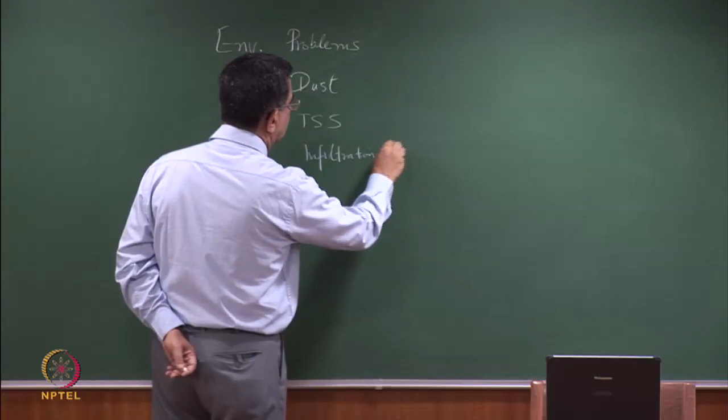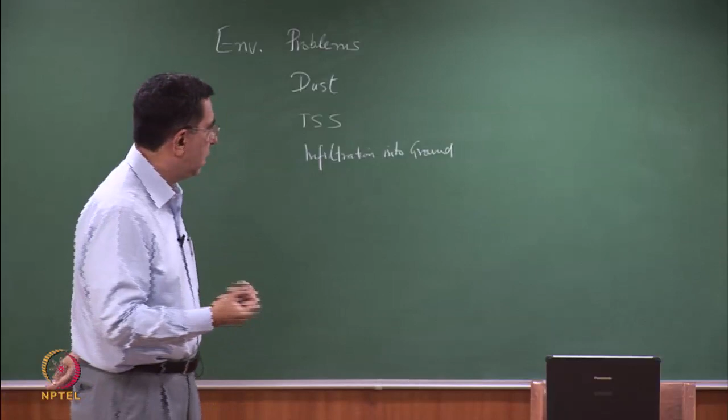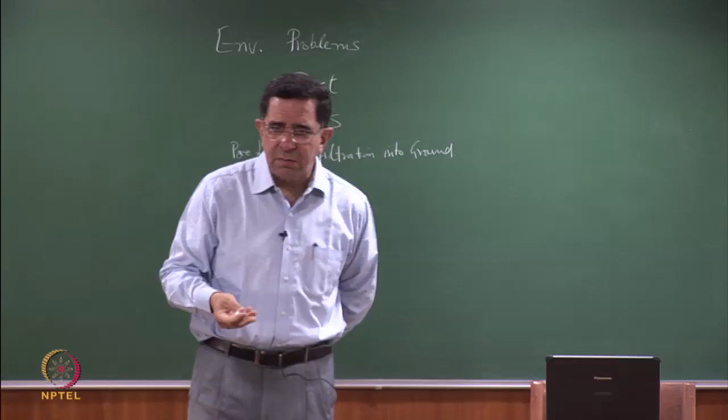Any other thoughts which come to mind, or any other issues which you think would influence? Well, it may infiltrate into the groundwater, but if the water is okay, so, infiltration into ground. So if the leachate, or if the pore liquid, is not of good quality, then you have an issue. If the pore liquid is all right, then there may be another related issue which we'll look at.

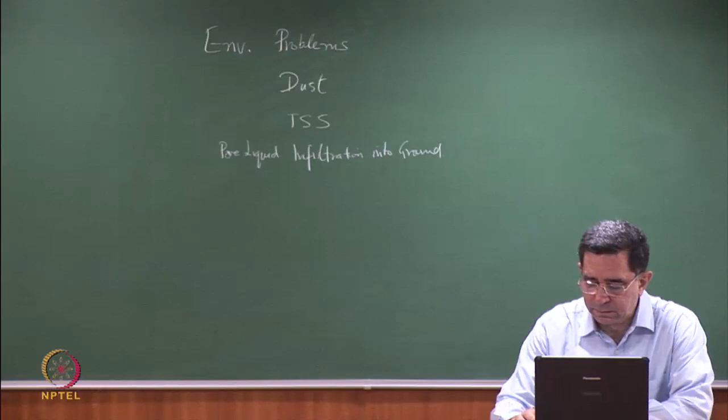So let us see, these are some of the factors which come to mind in an overall context. What are the environmental issues that we look at? If you look at an ash pond or a slurry pond, we talked about fugitive dust. The dust is not going to come out from the ponded area, it's going to come out from the dry area. Our tendency is to keep the pond as small as possible so that the phreatic line is not high, that can be a problem. But if you are very close to habitated areas, you might want to run your slurry pond by keeping the water level high.

Excess suspended solids in the decanted water is also another problem. As somebody said, leachate into the ground. Sometimes concerns are expressed that there may be some deleterious salts or material in this. So one issue is that those will go with the leachate to the groundwater table, but more importantly, if they also come out, they can affect the crops adjacent to it. There's not enough evidence to say so, but since this material is not natural but man-made, either from burning of coal or from crushing of rock and chemical additions to extract metals, sometimes there is an issue that some of this deleterious material will come out and affect plant growth, or it will be taken up in the roots of the plants.

Occasionally we do have the problem of overtopping, which is more a stability problem, but what is the difference? Suppose I have a water reservoir and I have overtopping. Overtopping will occur if the spillway capacity is not adequate, or if there is a large rain and you are already full up without adequate freeboard. Overtopping normally occurs when your ash or slurry pond is operating at full capacity and you have a huge downpour with spillways not having adequate capacity.

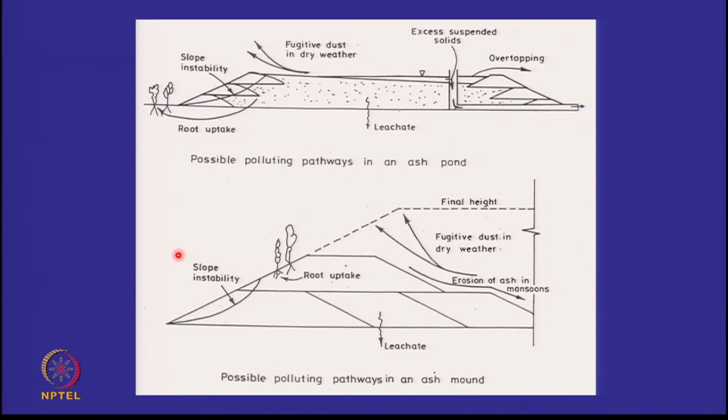So if I want to address the environmental concerns, I have these few issues: effect on local air quality because of dust, effect on surface water quality because of total suspended solids, and effect on groundwater level and groundwater quality.

So these are two issues which are separate. If I have got deleterious material, or contaminants in the water, if the pore fluid quality is not good, then I can affect the groundwater quality. But the other issue is I may also sometimes affect the groundwater level, and that may have its own associated problems.

If the dust is taking away ash, what is the effect on local soils and biotoxicity? Last year there was a big news item that apple orchards in Himachal were being affected by ash from a nearby plant. During the pollination period, the ash particles were settling down on the plants, and that was affecting the pollination, the conversion of flowers into fruit. It looks very innocuous, a small amount of dust, but in an area not used to dust, if you create an environment with small particles floating around, it can affect the local soils or biotoxicity.

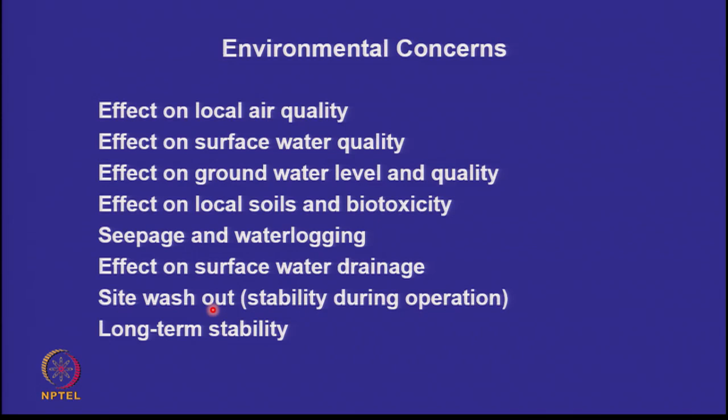Site washout or overtopping is of course an important issue. And finally, long-term stability. When the plant has stopped operating and everyone has walked off, who is going to look after it for 100 years, 200 years, 500 years?

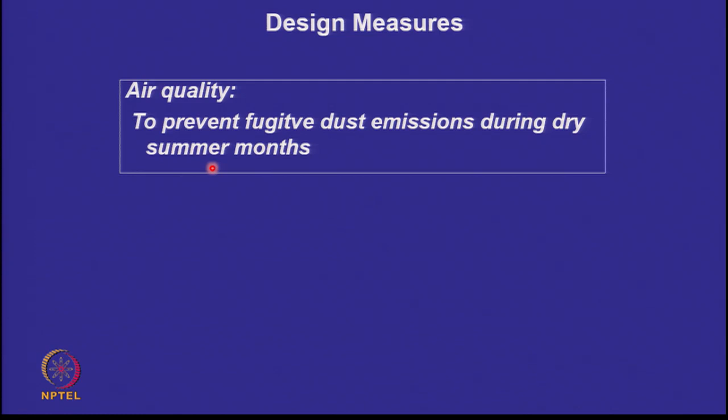So let's address this. The first question is how to prevent fugitive dust emissions during dry summer months. It's simple, you can do ponding. If you are in an area where dust is causing a problem, with a highway next to the pond causing huge dust emissions, or houses nearby, you can increase your ponding as long as you have excess water supply. That means don't operate the pond in summer months at a low level, increase it and keep the majority of the ash submerged.

One can also say I can sprinkle, but 24/7 sprinkling is a very costly exercise, and it is power dependent. I have not seen sprinklers which can keep the dust subdued 24/7. You may do sprinkling while you are there, you may have automated sprinklers, the idea is to keep the dust down, but 24/7 sprinklers working on any area I have not seen.

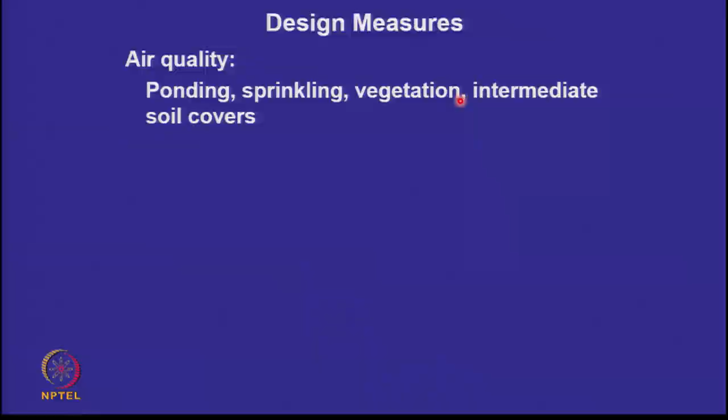Of course, when the pond reaches its top level, you should grow vegetation on it, either by putting a soil cover and vegetative growth, or if even on that material shrubs can grow, then accelerate that vegetative growth, because any form of vegetative growth will be a dust control measure.

And sometimes you might want to use intermediate soil covers. That means if you have a material going up to 15 meters high, you can build in an expenditure that after every 5 meters, you put in an intermediate 6-inch soil cover, so that the ash surface area is not exposed. This intermediate soil cover works more when you're using ash as a construction material in embankments, so that you don't leave very large patches of ash exposed in a dry condition.

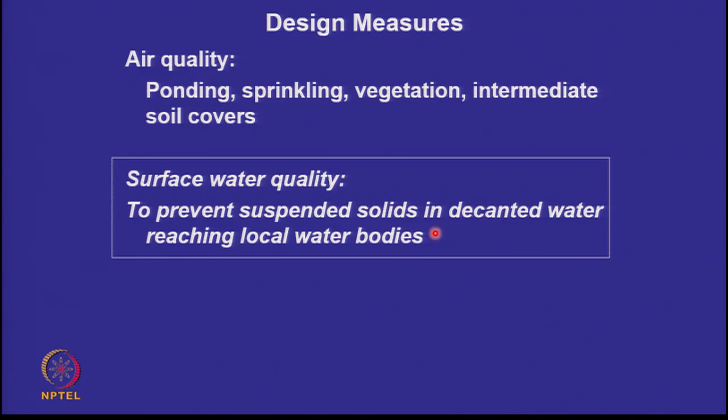Surface water quality - we have addressed this issue. How do we prevent suspended solids in the decanted water from reaching local water bodies? If the size of your pond is correctly designed, then the finest particles will settle and you will have clear water coming out. The problem comes when the size of the land available to you is smaller than the design size. Then you have a tendency for the coarse particles to settle, but a certain set of particles will pass out. For that, either we need additional sedimentation chambers, or filters which become choked and have to be periodically cleaned, or we can put a treatment plant at the end of the decanting pipe where you flocculate all these fines and deposit them.

It's very expensive. And finally, recirculation means that you are not releasing any water into the surface water body nearby. But recirculation you can do only for a limited period of time. The material keeps getting built up in the slurry water, and eventually you have to do a blowdown or release something, and at that time you will need all these alternatives.

So even today, sometimes when I walk to an ash pond, I'm often seeing this when the pond is full. When the ash is down, even if the horizontal travel time is not adequate, you can close the lower ports so that the water level also rises, giving time for horizontal travel and time for vertical rise. So you can have more retention time. But when the pond is almost full, you are not able to hold any more water, and that's the time when you find the emissions becoming high.

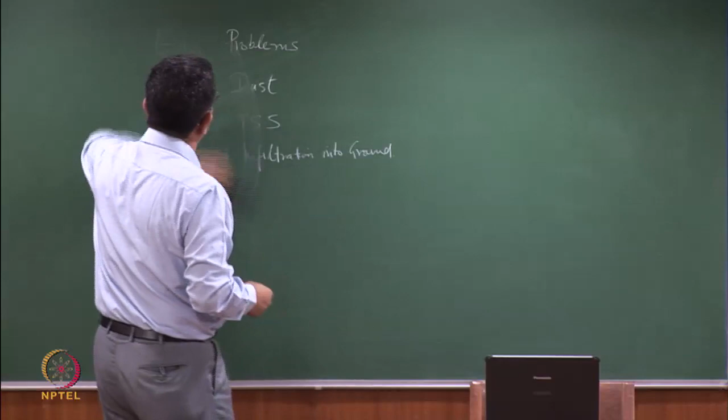In terms of groundwater, there are two issues: one is preventing the rise of the water table, and the other is deterioration of water quality. If I look at the issue of rise of the water table, I want to appreciate it this way: if you make a slurry pond in an area where there has never been a water reservoir in the past, your water is coming either from a canal or from a river, maybe 20-25 kilometers away, and now you have made this pond, which is like you have created a lake.

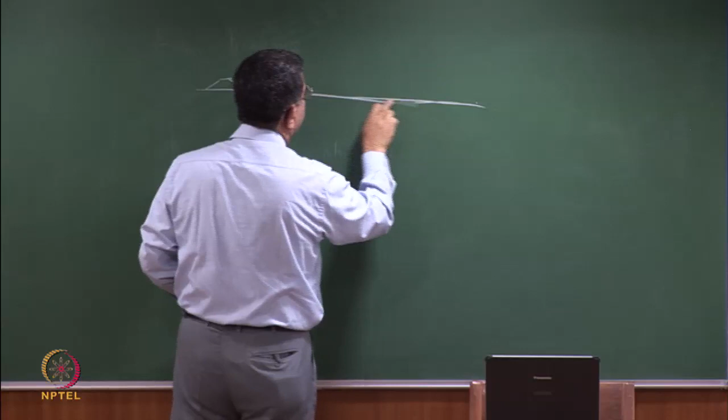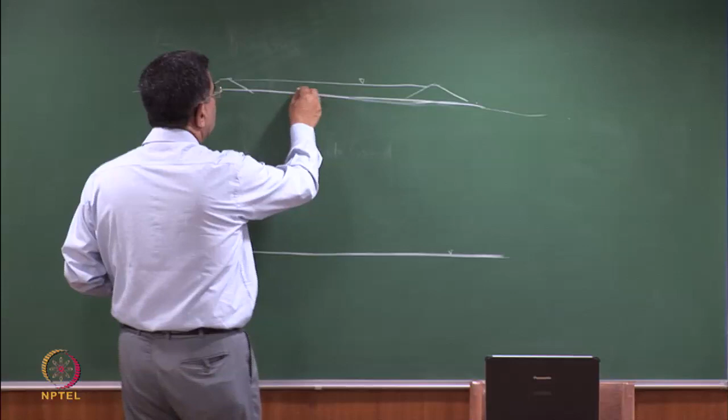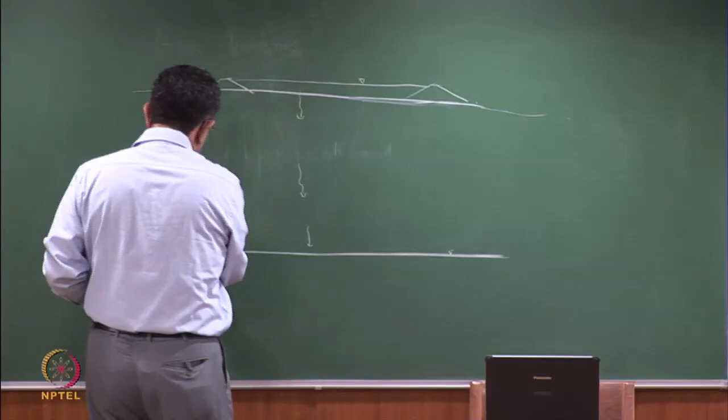So maybe in the original site, the water table is deep below, and you create a ponded area. Remember, this is going to work for 25 years, so you're going to have water most of the time in that period. If there is no barrier to downward flow - that is, no impermeable or very low permeability soil - then this water will tend to flow down. Some will be held, some will reach down, and if a lot of water is flowing down, the water table may rise, forming a mound of water in this area because a lot of water is coming. Eventually it will just flow away. When the pond stops functioning, the water table will come back to its original position.

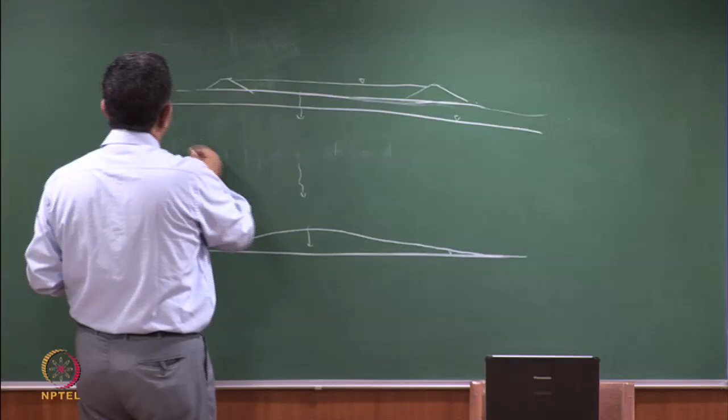If my water table is here to begin with, then I have to be very conscious of the problem, because then this water table and the pond water will get interconnected. The water table rise may look like that.

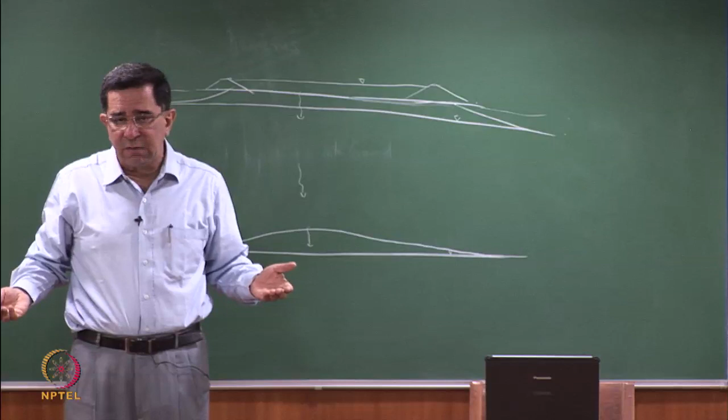And this water table may rise. Now, as long as the water table rise is beneath the pond, it's fine. But if the lateral permeability of the soil is high, the water table rise may start to extend beyond the pond. And I'm not talking of the seepage water which is through the embankment.

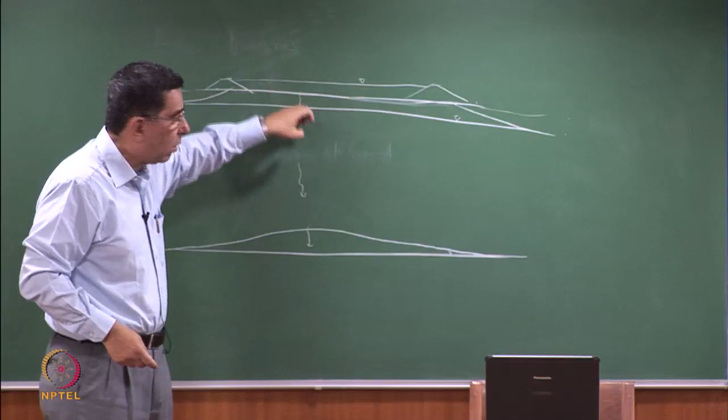I'm talking of the water which is going down. Now, when this water table rises, sometimes it brings up the salts from below, which were not in the crop zone, root zone of the crops, up. And that sometimes has an effect on the production of the crop output.

In some cases, it may be very good. If you are in a water deficient area, what have you done? You have started giving more water to the area. Assuming that the water quality is not affected, the farmers around you are happy. There is more water in the tube wells, there are more water in the irrigation wells, so that's good for them.

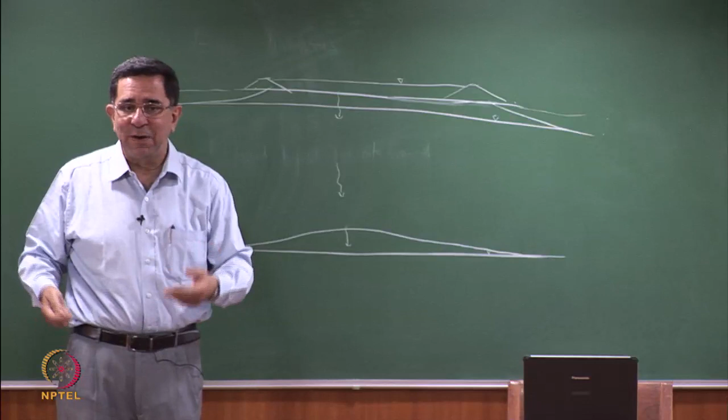You are in an area where water table is already aplenty and close to the ground surface. You are doing the opposite effect. They don't want more water, they don't want the water table to come higher, but we are making it go higher. So this causes the water table to rise. It can be beneficial in a water scarce area. It can be problematic in a high water table area.

So the one thing that we have to realize is, as you will see here, if this is the original groundwater table, this is the original land, I have come and made my ash pond or slurry pond, my water table has risen, it has become connected. After some time, when the ash pond or slurry pond is not being operated, there will be no water. You will put a soil cover, you may put some vegetative growth on top, and then the water table will return to its original position. But for these intervening 10, 15, 25 years, you can have some effect of raising the local water table, and that you have to take into account.

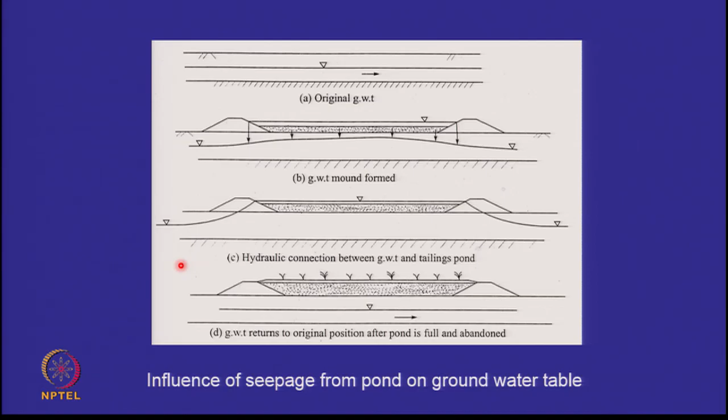So, what about the quality? Before we look at the next issue, what about quality? Water quality will depend on the slurry water, that is, are you getting treated water? Are you getting raw water from a river? Is the river water itself in the summer months having high contaminants?

Now, normally the water that you get for the purpose of making a slurry or for the purpose of chemical processes may not be a very high quality water. So then what you are doing is, you are picking up the water, making a slurry and depositing it on land. So if the water quality used for making the slurry is bad, then it can impact the groundwater quality. The other is, no, inflow water was good, but my tailings had some residual chemicals, and those chemicals are now mixing with the water and going down. So this is a very waste material specific problem.

For a long time, there has been a huge debate that does the groundwater quality get affected by burning ash, by burning coal and using the slurry technique of depositing the ash. Does the quality of the liquid in which the ash has been mixed with the water, does it affect the groundwater table? And there have been so many studies which show there is no effect. If there is an effect, it may be because the original water quality was itself bad.

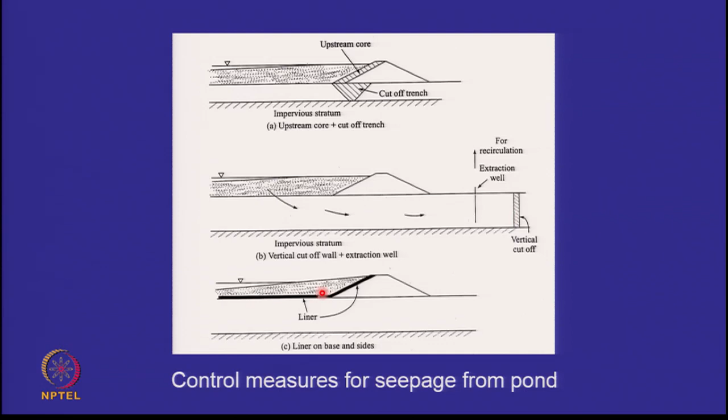So this is the best. And while the word used is liner, it means it has to have bottom drainage also, and liner. Because otherwise, incremental raising is very, very difficult. So purely from the point of view of affecting the groundwater, both in terms of the groundwater table level as well as in terms of the quality, you are safe if you use a liner with bottom drainage.

However, it's expensive because the size of these ponds is huge, 2 kilometers by 2 kilometers. So that's a very expensive bottom barrier that you have to create. But there are no options at the moment. There is a ministry guideline saying you must put a liner at the bottom. It doesn't give the details of the liner, so people will put some thin plastic sheet to meet the Ministry of Environment and Forests guidelines. In the US now, they are specifying the requirement of liners and bottom drainage. The rules have just come out in October 2016. So really, if you are looking at groundwater quality as well as groundwater level, bottom drainage and liner is a good thing.

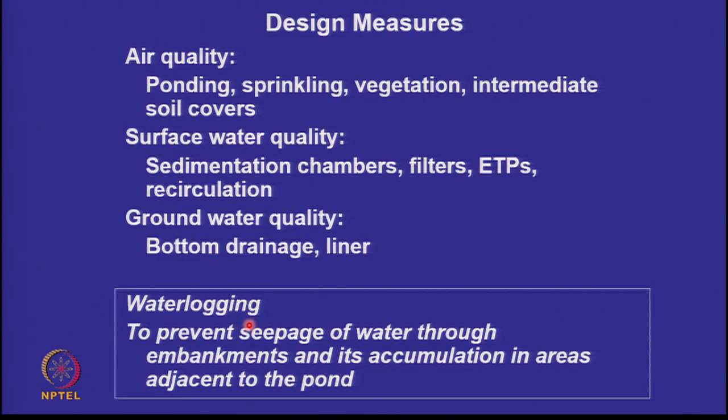Even if we have taken measures that the groundwater will not rise, we still have sometimes the issue of waterlogging. And waterlogging is normally due to seepage from the embankment, not from the base. It can be accentuated from the base as well, but if you don't collect your seepage water properly and connect it to a surface water drain, then what will happen is, suppose in plan I have a rectangular pond, in some area, the water may start to seep out and collect outside, and that causes waterlogging.

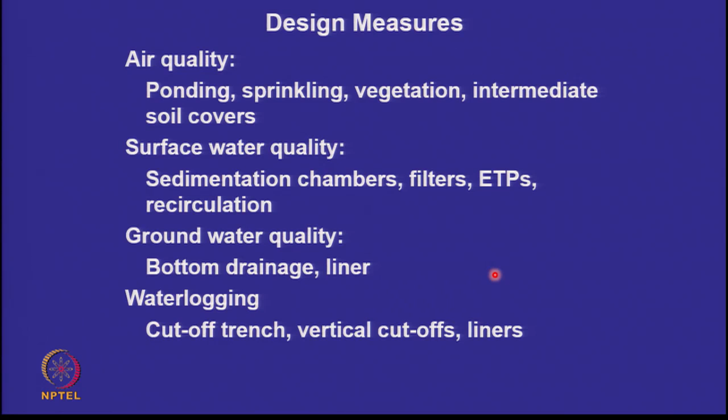So to prevent waterlogging, it's best to have a cut-off trench, which I showed, or vertical cut-off walls. Liners, of course, are the best solution. But in any case, your surface water drain or the interceptor drain outside the embankment should be able to take away this water and connect it to the local drain from which the water flows away. So efficient collection of the seepage water is important, and measures that ensure nothing from the bottom comes to the sides are also important.

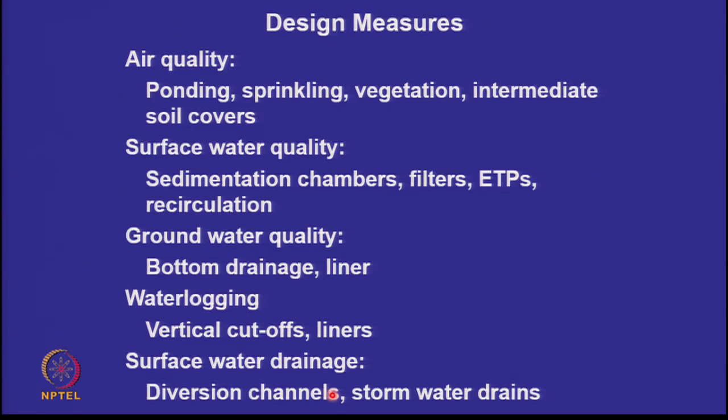And we've done this surface water drainage issue, blockage of the surface water drainage path, that if we are in a low-lying area, we normally don't consider this, but we have to make diversion channels. So if I'm in a low-lying area, let us say I have a concave upward shape, and the elevation of the ground on one side is higher, on the other side is lower, and you have made your pond or landfill in between. If I do that, I have to give channels at the side so that the water which comes from behind during the rainy season is not stopped by this whole mass of waste disposal facility that you have created, but it should be able to go from the sides, bypass this, and meet this in the front.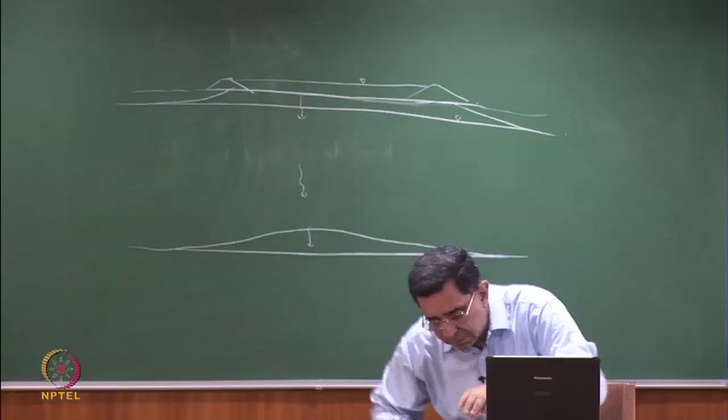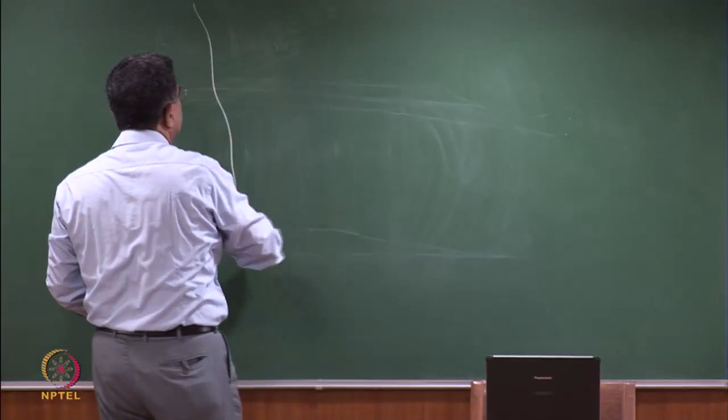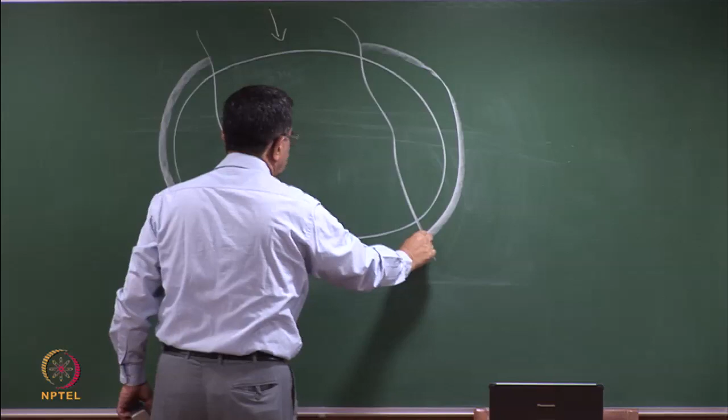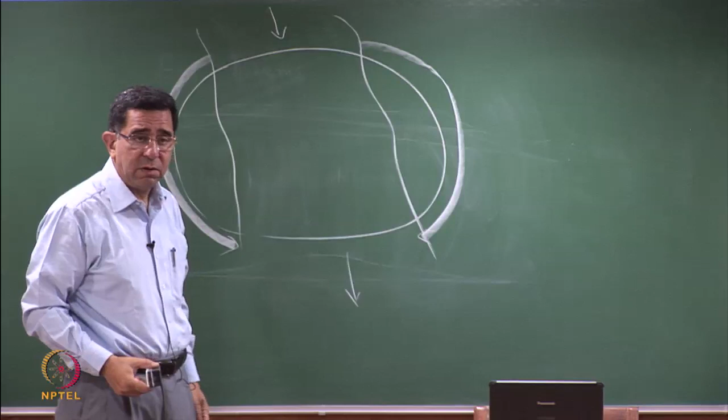So we have to create alternate flow paths so that there should be no ponding of water behind it. So if I'm looking at in plan, let us say this is a low-lying area, and I have used this area for the purpose of creating a pond or a landfill. Now when the flow comes, there will be ponding of water behind it. Instead of that, I need to have alternate paths in the form of channels so that this flow continues uninterrupted and does not cause ponding upstream of this facility that you have created.

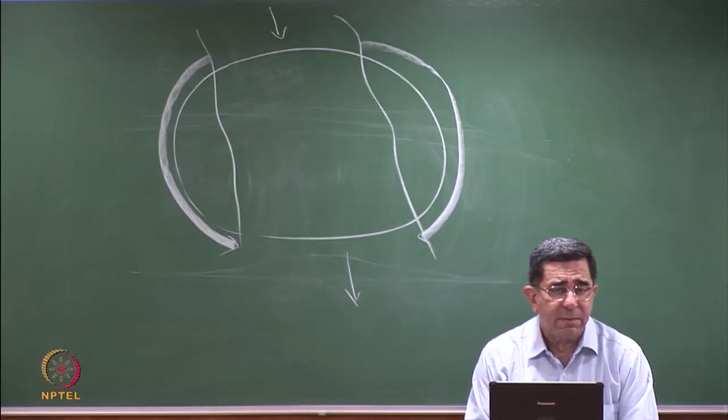Finally, we would like to address the issue of long-term stability. I have made a pond with all these measures that we have talked about here. The only question is, are we bothered about long-term stability? Long-term stability means when human intervention stops. I don't have a maintenance engineer on it for life, or for 100 years or 150 years. Then the facility you have created now is a topographical high. You went up, going higher and higher by the upstream method. There was no topographical high in that area before. You make the embankments, you put some vegetative grass, you go away, nobody irrigates it, and the grass begins to dry up. So you must have something which is stable for at least 50 to 100 years after being abandoned.

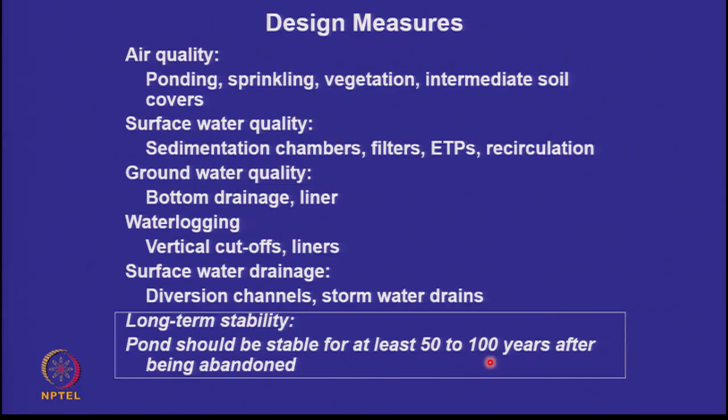One issue is the top surface - we have to put soil on it and do vegetative growth. The other issue is also on the sides. Any vegetative growth assisted by irrigation will not survive, so all vegetation has to become self-generated vegetation. That means the local shrubbery and local vegetation has to be put in position.

The only last thing that is bothersome is the material deposited between the embankments by the upstream or downstream - that's soft or loose material hydraulically deposited. Should we densify it before we move on, or should we leave it loose? That's the only question.

Densification is not easy or cheap, but if you remember your ground improvement techniques, in situ densification of coarse-grained soils, or silty sands and sandy silts, you have a few alternatives. Do you remember those alternatives? Impact compaction, vibroflotation, compaction piles.

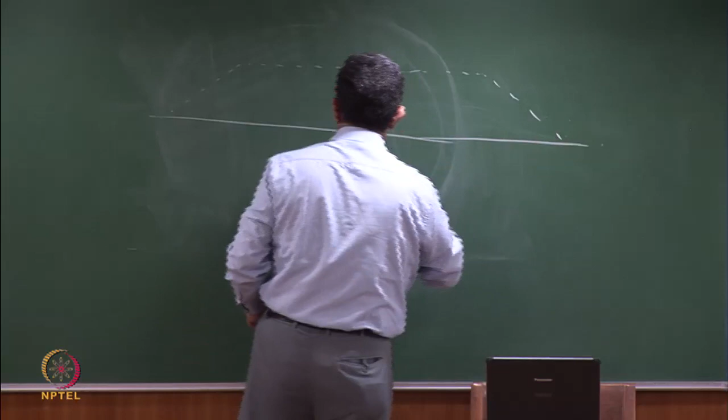Blasting - the idea is, I have created a mass 1 kilometer by 1 kilometer, say 20 meters high, which is relatively loose. If I don't densify it, the top surface will eventually settle with time. So one option is to have adequate convexity in the closure. If the final profile is like this, I should give adequate convexity at the top so that surface water is always running away.

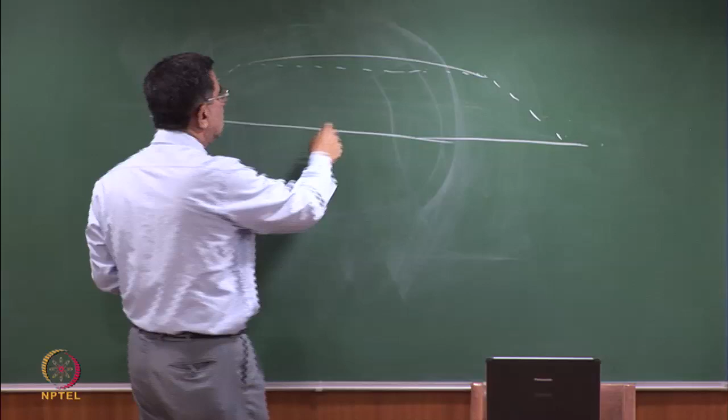And the other question is, should I densify? If you can, why not? And as I said, it should be self-generative vegetation.

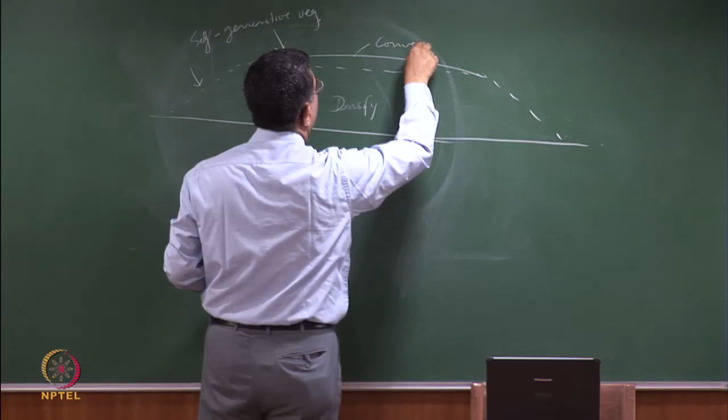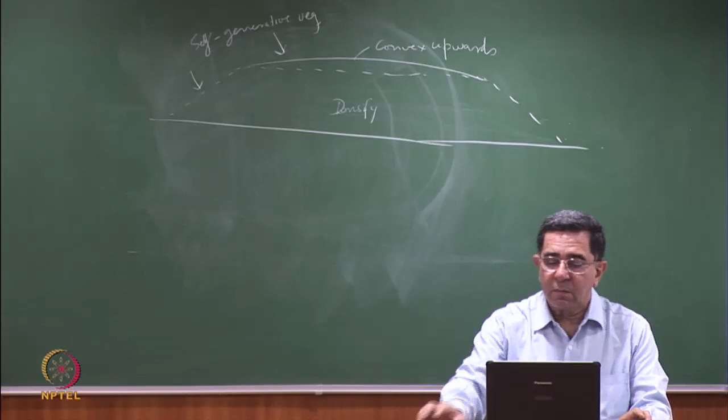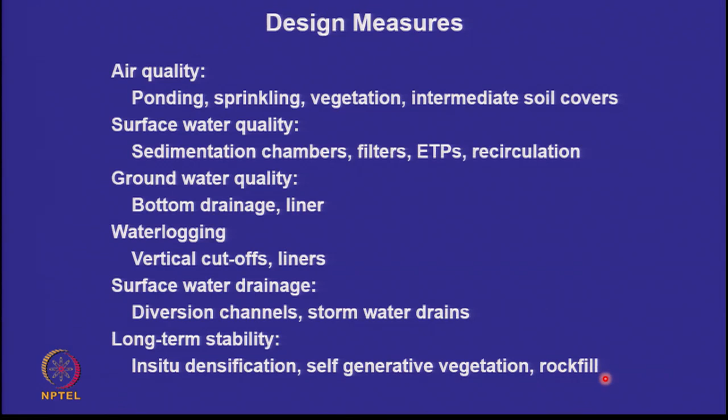So long-term stability implies in situ densification, self-generative vegetation, or rockfill. If you cannot get it - suppose you're in an arid area, dry arid area like Rajasthan, and you don't have self-generative vegetation there - then you might have to put a riprap or an armor, a hard material which doesn't blow away and doesn't have erosion.

So eventually, an engineered closure of a slurry pond - a liner and a drainage material here. These are your upstream raisings. You had the soil cover on it, you have to have vegetative growth, you have to have a soil cover on the top, vegetative growth, and you have to have it densified.

If you intend to densify, the cheapest method for densification is blasting, because blasting is like creating artificial vibrations and densifying. It will not be uniform though - so don't think that after blasting you're going to get very uniform compaction.

When you're going to build buildings or any structures on it, you'll still have to locally densify that zone by vibroflotation or compaction piles or whatever you want to do. But as a mass, if you want to densify the material, do blasting so that this mass remains stable later on. So what you do will depend on where you are.

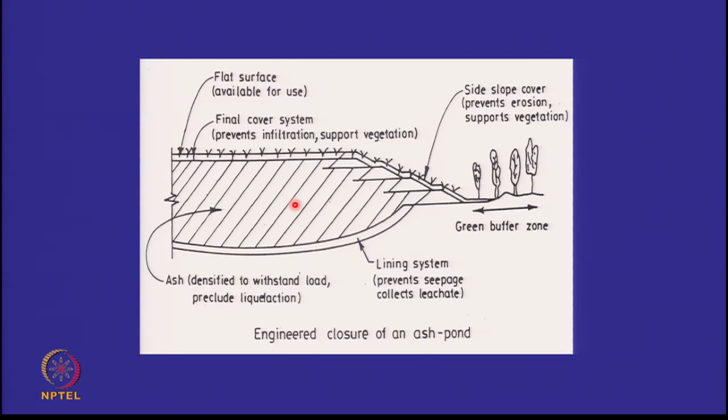There is an ash pond of NTPC at Badarpur in Delhi. The land prices are huge, so the real estate industry wants that land. You have already reached the final height - it's at an elevated height of about 20 meters, and the top surface area is 1 kilometer by 1 kilometer.

Everybody says I can build a building. So you say no, it's on a loose deposit, 20 meters deep. So what? I'll put a 30-meter deep pile, or I'll densify this, because the cost of land is so very high near Delhi.

So for those ponds or waste disposal facilities which are not hazardous - because on hazardous material people are very reluctant to allow usage at the top - but those which are not hazardous, you are able to take in situ densification measures because the land value goes up. Whereas that may not be possible in a remote pond which nobody else is going to use for real estate tomorrow. So actually the measures you take depend on the additional value add you will get and how you will use that pond later, for what purpose.

So remember there is the cost of environmental protection. During operation you have to protect it, because after the operation the water is gone - unless you made the mistake of leaving it finished in a concave upwards or flat section which would settle with time at the center. If you leave it concave upwards by mistake, when the rain comes it will all accumulate at the center of the pond.

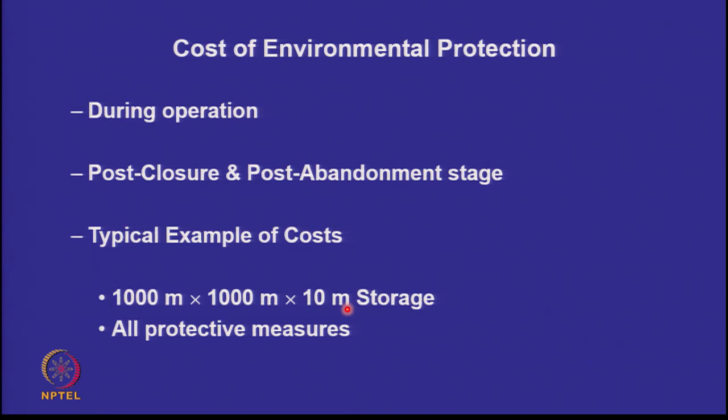So if I look at a 1 kilometer by 1 kilometer into 10 meter high storage, what is the cost of disposal in a slurry pond versus a municipal solid waste landfill versus a hazardous waste landfill - we are not including transportation costs. Once the material arrives at site, which do you think will be the least costly? Slurry disposal versus hazardous waste disposal versus municipal solid waste or non-hazardous waste. That means the cost of spreading and compacting the material, cost of liner, cost of cover, final systems. So just see, there are some relative prices from a study done in 2005.

You see, when you have slurry waste, it spreads by itself. So you don't have dozers and compactors running on the surface. The power of gravity flow of water is used for spreading the ash. So therefore, ash disposal, even if it has a liner and a basal drainage, is relatively less costly compared to municipal solid waste, which has to be spread and compacted, and less than hazardous solid waste, which has to have a double liner. So the cover and the liner of the hazardous solid waste predominate the cost.

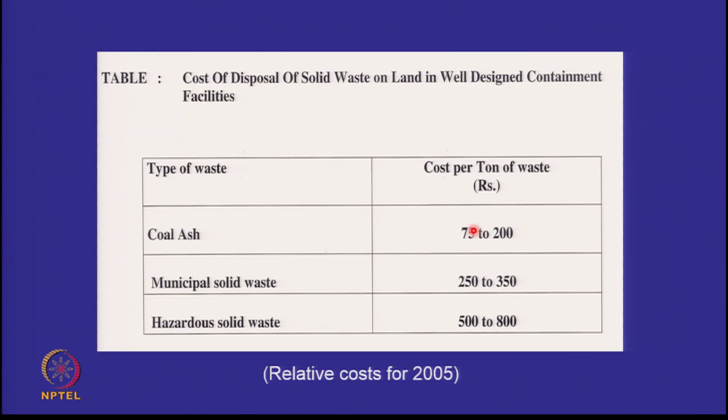So in the end, I'd like to say the following: the first mantra is minimize waste. Just remember, go back to your integrated solid waste management principles. Maximize the utilization of ash or tailings or waste.

Can everything be used? As soon as the material becomes characterized as hazardous waste, please understand - suppose you have mine tailings and it's mostly crushed rock, soil-like material, but it has something sitting on the surface which is leachable, and by the TCLP test, it becomes classified as hazardous material. You can't use it without stabilizing it. So as long as the material is non-hazardous, we are basically dealing with silty sand and sandy silt, we can use it in earthworks.

So maximize the utilization of ash or tailings or waste to the extent possible. Geotechnical use of pond ash or tailings in earthworks is the most economical. People say I can use it in cement, I can use this material to make bricks, I can use it to make blocks - everything fine. But you want to use 10 lakh cubic meters of ash or 10 lakh cubic meters of non-hazardous tailings. The simplest is maximum utilization in embankments.

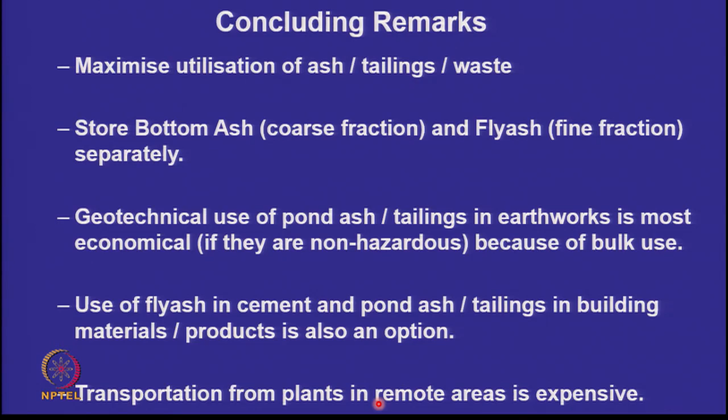And always remember, transportation from plants in remote areas is an expensive exercise. So what you will find is, if you look at the map of the country, those slurry ponds which are close to urban areas with high density populations, their material is being used very often. And those which are sitting in remote areas, there's no utilization.

So you have a thermal power plant which is in Rihand or in Vindhyachal versus a thermal power plant which is in Delhi. The utilization of ash in Delhi is so very high, and the utilization of the Rihand power plant is so very low, unless by any chance cement plants are sitting right next to you in those remote areas as well.

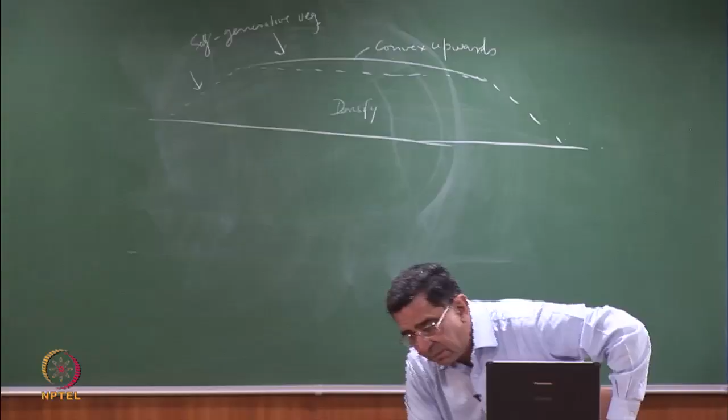So with these, I think we have come to the end of the discussion. What we have learned is that to keep the environmental impact minimum, have an envelope which prevents the emissions. Whatever emissions come out, if they are decanted water, please ensure there are no total suspended solids. If the emissions are in terms of groundwater contaminants, then please put a liner and do not allow them to escape untreated.

Eventually, both things look the same, landfills and the ponds. But sometimes do remember that if you were to do a hazard risk analysis, then depending on the material being disposed, the waste, the same size, the same quantities — if the hazard risk is higher, then the measures will be more stringent, and if the hazard risk is lower, the measures may be less stringent. That will come out from a more detailed analysis of the type of waste that you are dealing with.